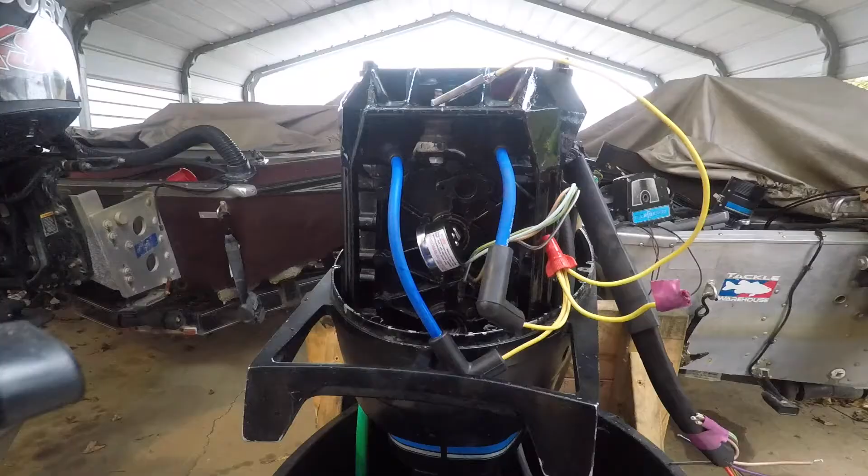This is a no spark situation, sort of like the last one I did. Do a compression test. I'm gonna get my timing light, pick it up. Well, we don't have any fire. See what we got for compression.

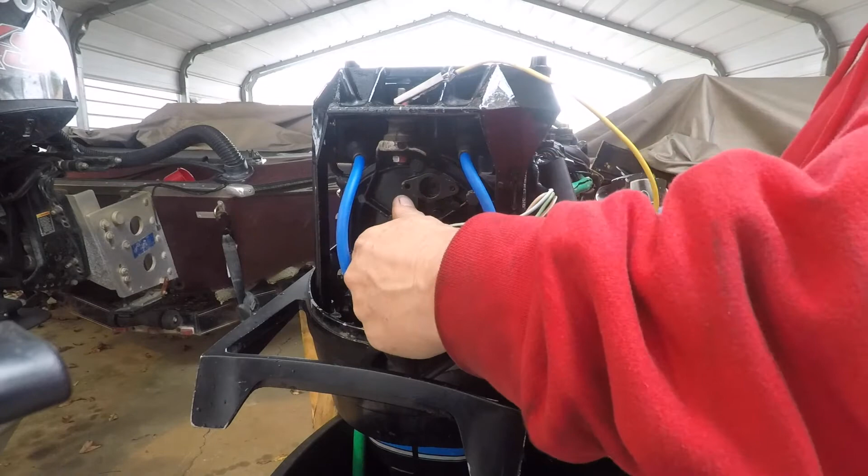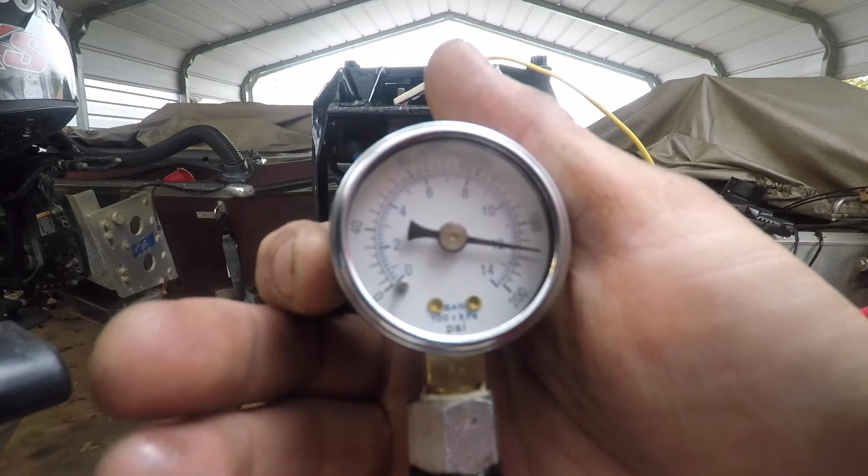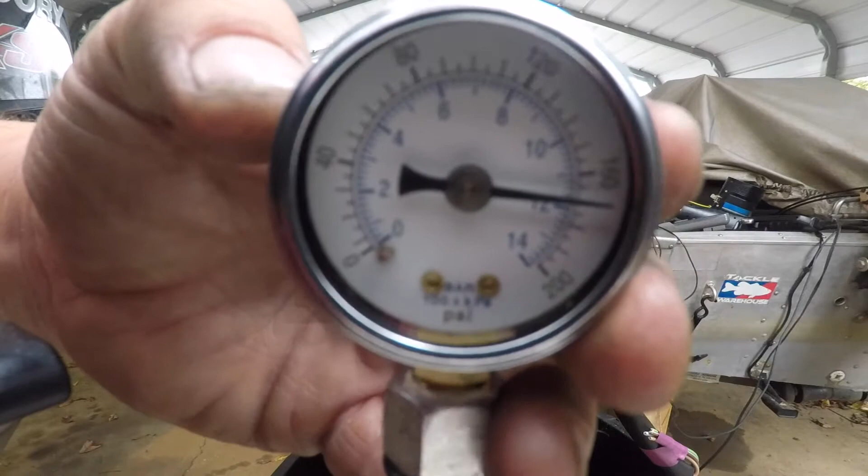I think that one's, you know, over 170 pounds pressure. Alright, no fire. Alright. That one is 170 as well. So yeah, real good compression. Yeah, so this is a no fire. So we just have to figure out why we don't have fire.

I'm gonna have to take this off to get to the coil to see if I'm getting voltage to the coil. We have a bad trigger or switch box or... Okay, we got under the flywheel, you got the coils. I got my setup where I'm grounding out the coils. I got my timing light here. Of course, I have no light, so I have no spark.

Working backwards. We do have the right wires connected to the coils. Number one green, green and white is going to number two. The customer already replaced the coils, so I haven't checked them, but working backwards, obviously this is your ground. We need to make sure this ground and that ground are the same. Okay, so let's start with our grounds.

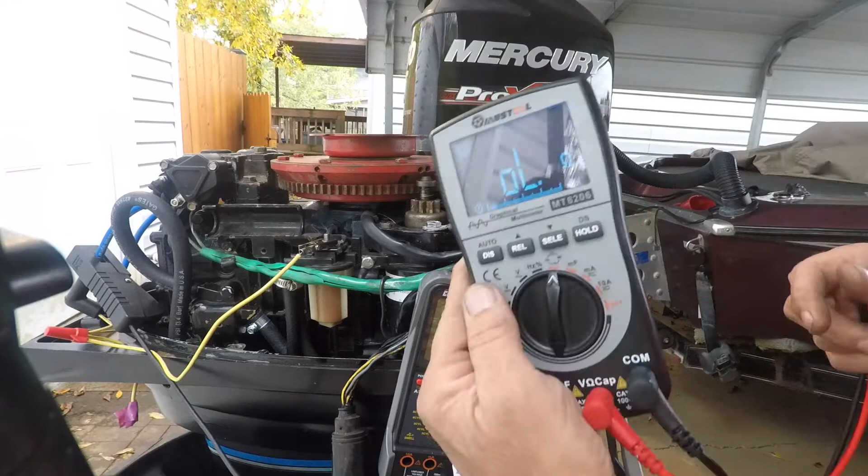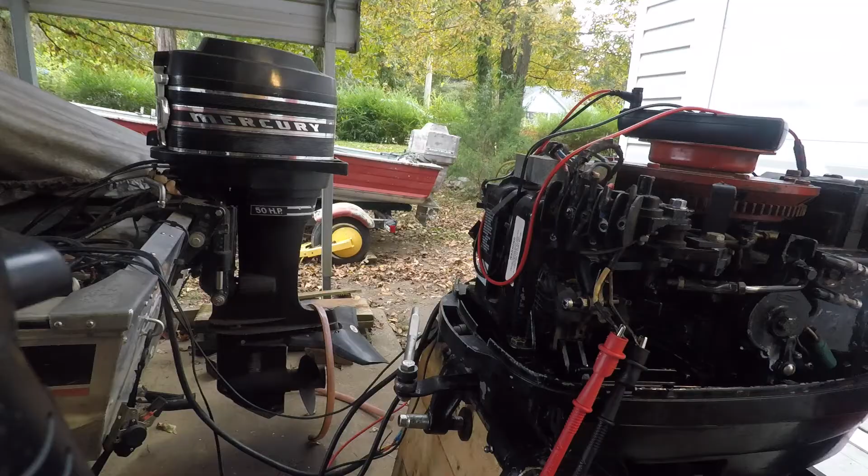Alright, we got the Mustool. It's a cool little meter. So, continuity check. It's going to go to the ground of the box. We got ground on that one. We got ground on the second coil, so we know we got ground there. I got my two leads on the trigger. Okay, and so for this trigger, there's only two wires, two cylinder.

If it was another cylinder, you'd have another wire. If you have four, you'd have four wires. See what kind of voltage we have there, because it's going to be AC. We're on AC. Okay, about 5 volts.

Take the plugs out. I didn't realize the plugs went out. You take your plugs out, it'll help turning it over, so we need to take those out. On our Mustool, we want to go ground. I know this is ground. I check my grounds. Check from here to here, that's a ground. There's no fuel going in it, by the way. So next, I'm going to take those spark plugs out. I'm going to put some WD-40 in there.

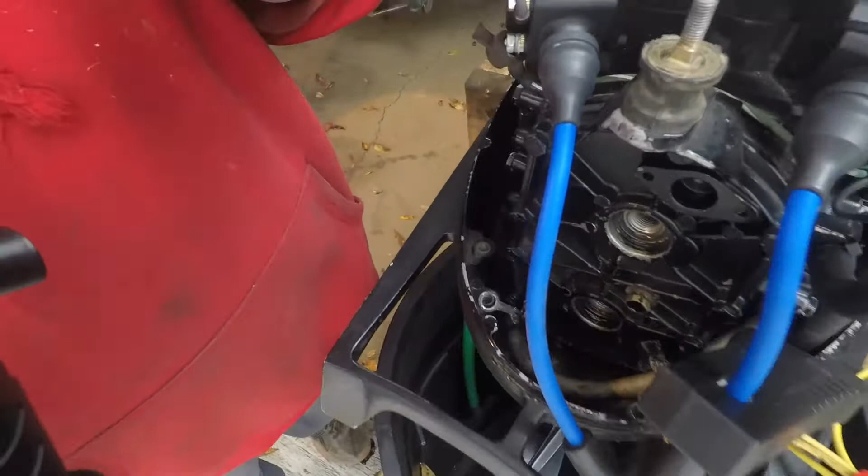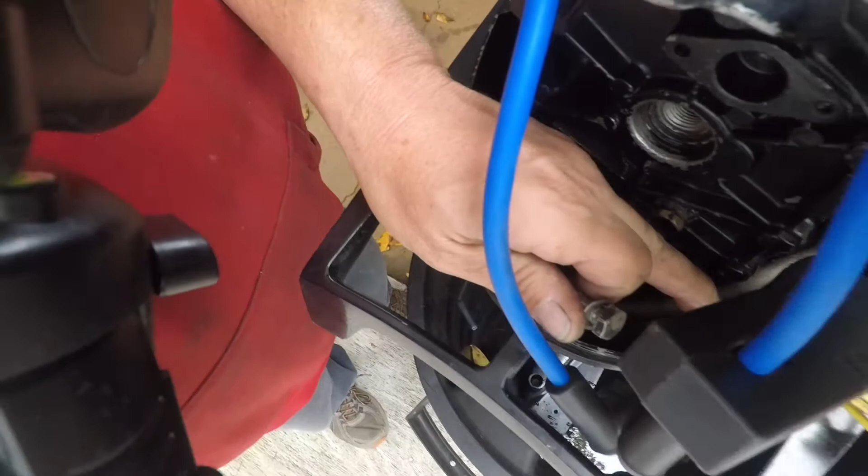One thing to remember: when you take that back shroud off, you got two ground wires. One's here, the other one's over there. You need to put the screw back in it just so it gets a ground. Otherwise, you'll have no spark.

So now this is going to be AC voltage. I got it on 750. I'm just checking the one side of the trigger, the hot side of the trigger. Showing me about 5 volts. The DC voltage, so we're a little low on that battery, but I have been cranking it. So probably need to put a charger on the battery.

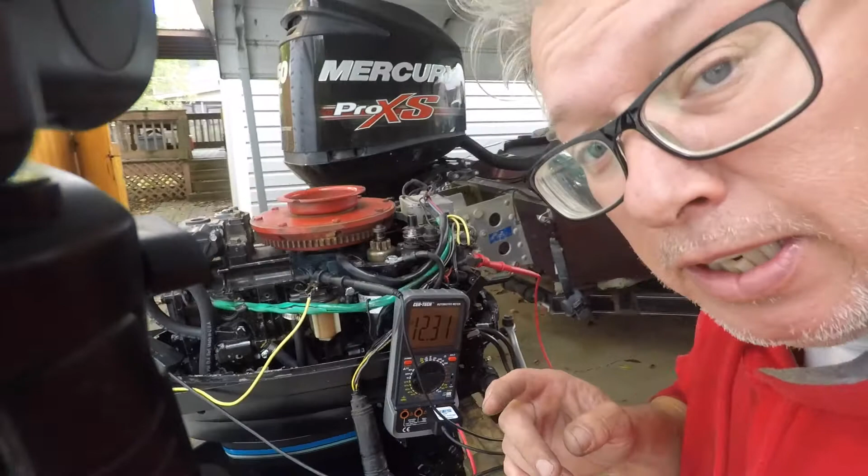One thing about this is you want your battery to stay up, because a weak battery will cause your starter to go out. It's pretty robust, but you send that weak voltage over there and then all of a sudden you got a starter problem. So good tip. See, now I'm at 12.45 volts.

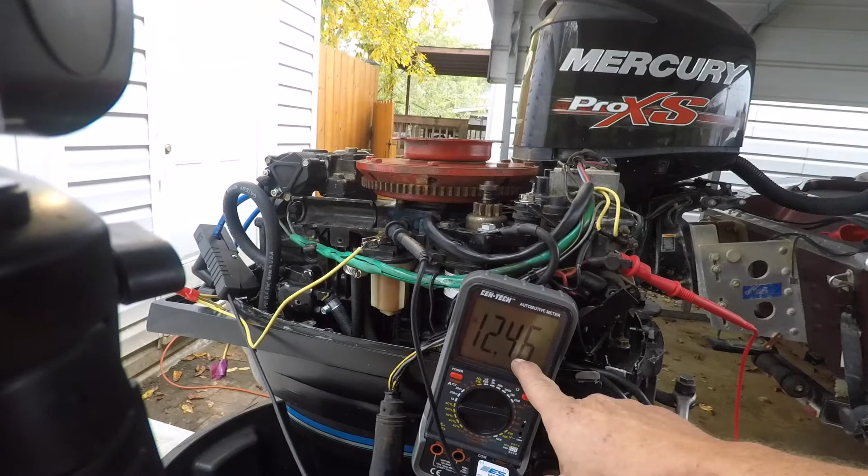But whenever I crank it, I just want to know if I see that voltage go up. Then I know that rectifier's working. You see it go up, so that's for sure knowing that that's working. The way to check that is to go ahead and disconnect these. I could do an ohm test, and I could also do a continuity test.

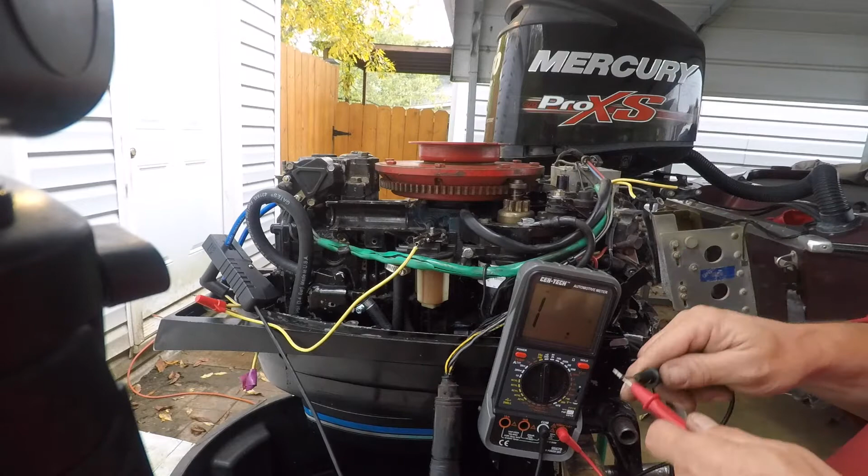We're going to go back to our regular meter leads, not the DVA meter. I got my two yellows that are disconnected from my stator, and we got continuity selected, so there's no resistance and continuity, so that's good. So I've tested the stator now, so these can just go back on. And this gray wire is just a tach. That's where your tach would come from.

Alright, so now we go look up and see what voltages and resistance we should get from the trigger. Okay, so to back up a little bit, if we've got an ignition problem, no spark, you really have to test everything in the ignition system.

So under the flywheel, you've got the stator, and you think of it as providing power for everything. Okay, so you've got two yellow wires that go over to our rectifier. We've got those two yellow wires that go into our rectifier, and then if you look at this cable, there's two more wires, a red and blue. Okay, and what that's doing is powering up through this bus bar. I've got red disconnected right now.

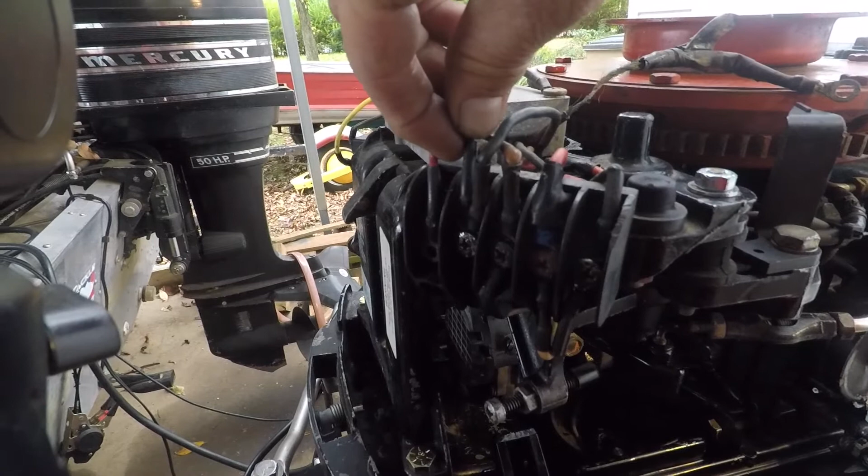Okay, and it was, yeah, they're building another subdivision. That's cool. I got that on camera. That's pretty funny.

We've got our blue wire. Okay, and that's coming from our stator, and that's powering up this box, our switch box. And then there's a brown wire, and that, if it goes to ground, turns the switch box off. Okay, then we have our trigger, which is telling the switch box when to fire.

Okay, and it's coming this way, so we only have two wires on this motor. Some of them you'll have 3 or 4, depending on how many cylinders you've got. And so test your trigger, make sure you're getting the right voltages. Like on a trigger, I had almost a 1K resistance. Alright, and then across the leads, we're getting 5 volts.

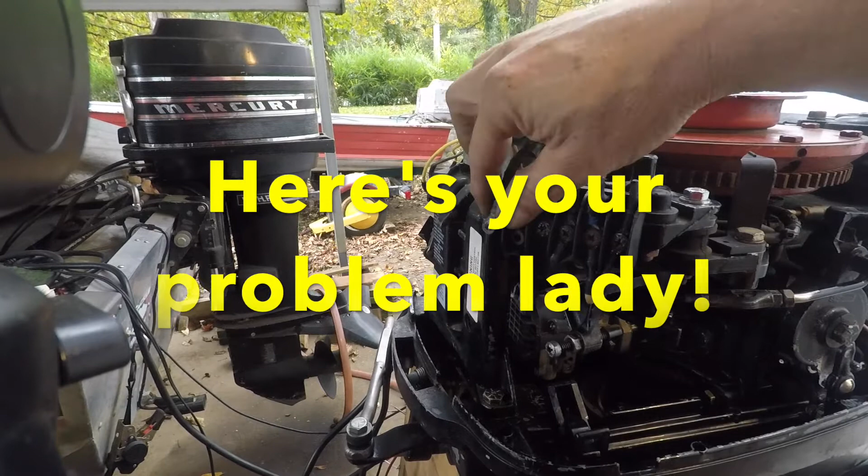I did find this wire, which would be our hot wire, to power up the switch box. It's completely frayed, so it probably needs a new switch box. I'm going to see if I can make a repair and get it to fire, but I would recommend a new switch box, because I know that's probably not good.

Looks like they also made a repair from the trigger side on this hot line. It's right here. Okay, and so we don't know if that repair is good. I take a screwdriver, just pop these off, and then take my switch box off. I'm gonna put it on the bench, see what it looks like.

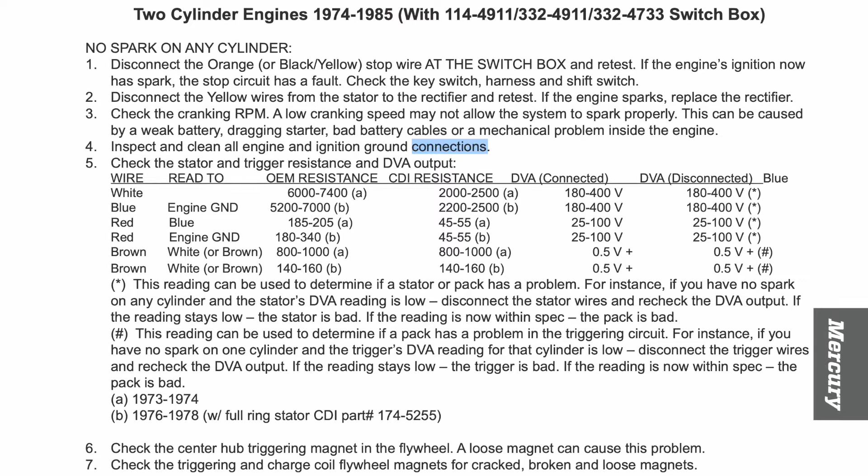Okay, this is from the CDI. This is a company that makes switch boxes and stuff. Anyway, this is our troubleshooting guide, and it gives you some ideas on voltages and resistance. So if you look, it gives you some indication for no spark on any cylinder. So if we look down here, check the stator, trigger, and DVA output. Okay, and so white wire, if we look, it says wire read to.

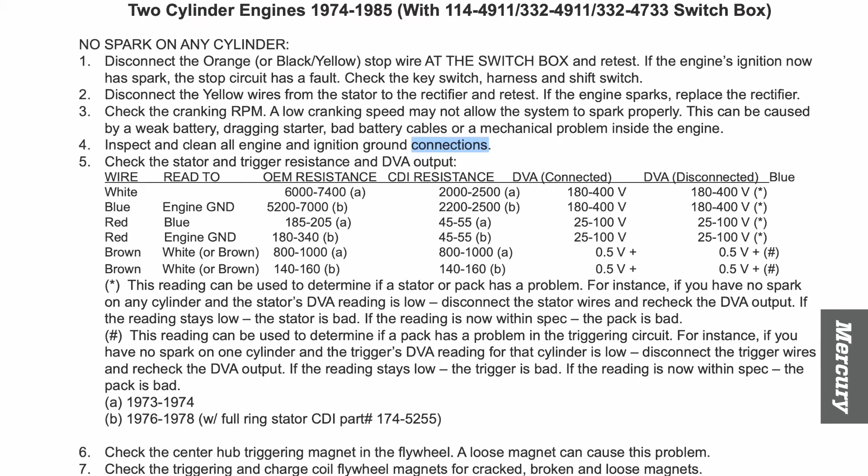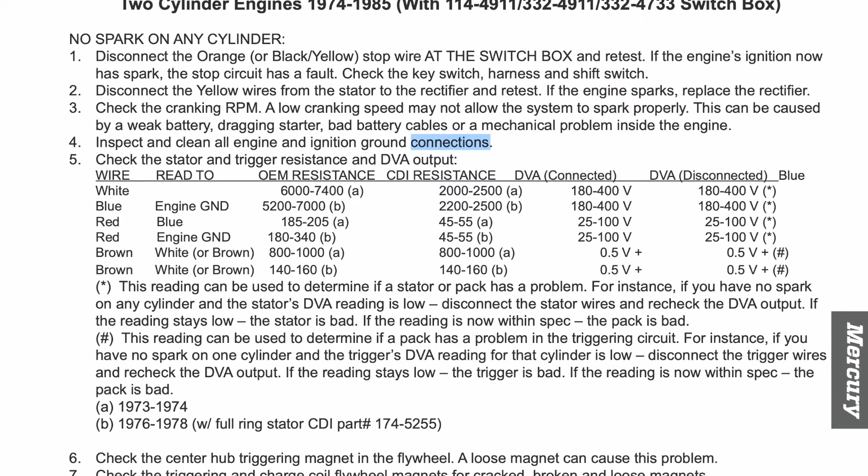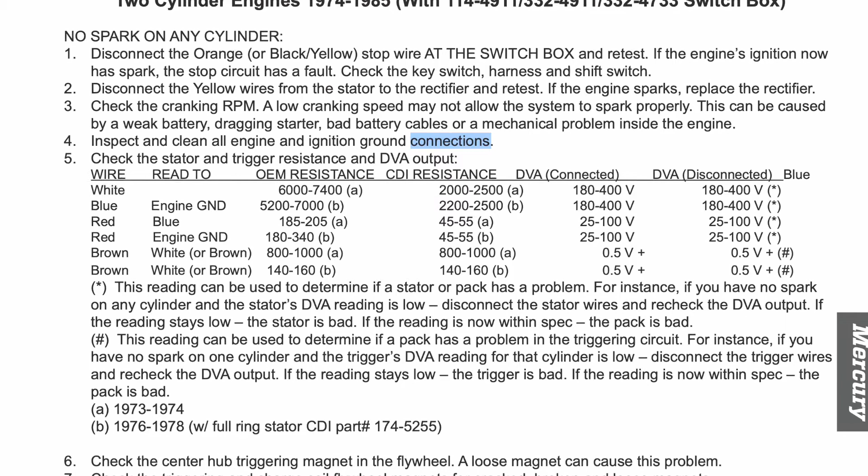So if you see blue and red, it's coming from the trigger. And so we should have around 5,200 ohms. So we got around 7K, and that's pretty good for us. We've got, looks like, from red to blue around 185 to 205 ohms. Then we've got red to engine ground, 180 to 340 ohms.

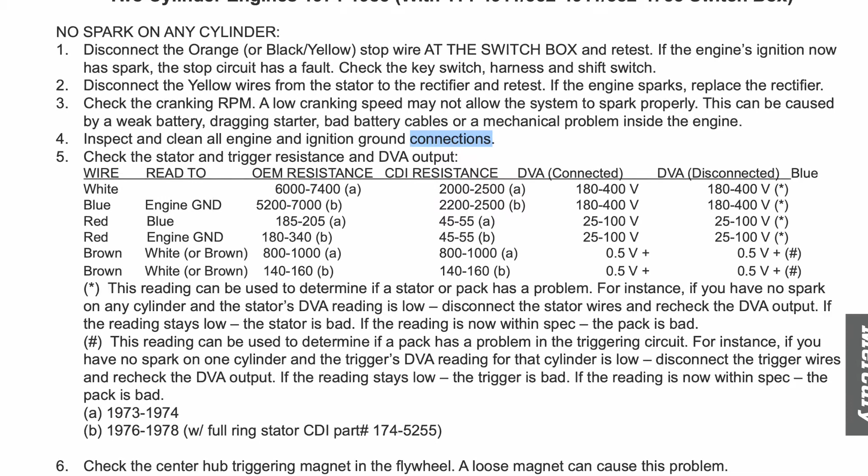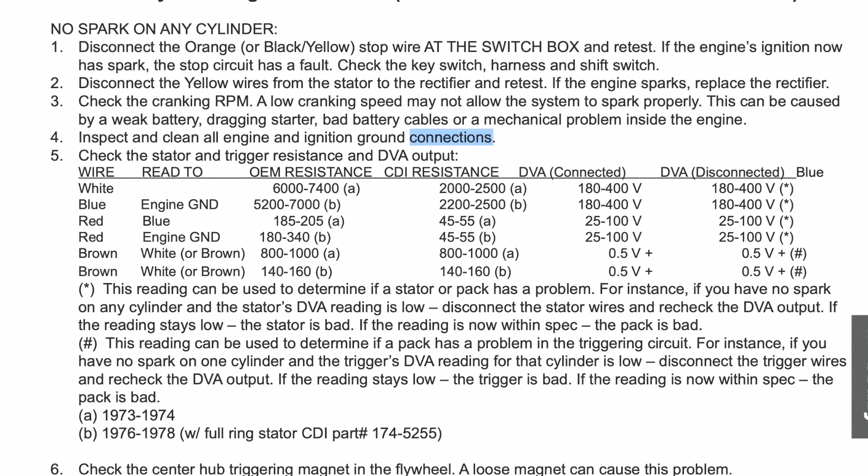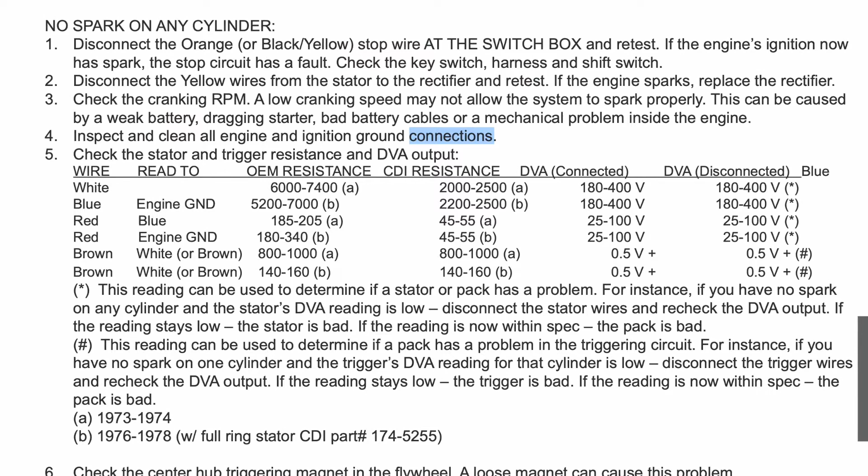Brown to white/brown, which is ground to the 2 wires that come out of the trigger, and it should be around 1K. And then brown or white/brown, the other side of it should be around 140 ohms, and it's showing us like 0.5 voltage. So it gives you a good idea where to start and look and make sure that your trigger and your stator are in spec, and you should be able to find that online.

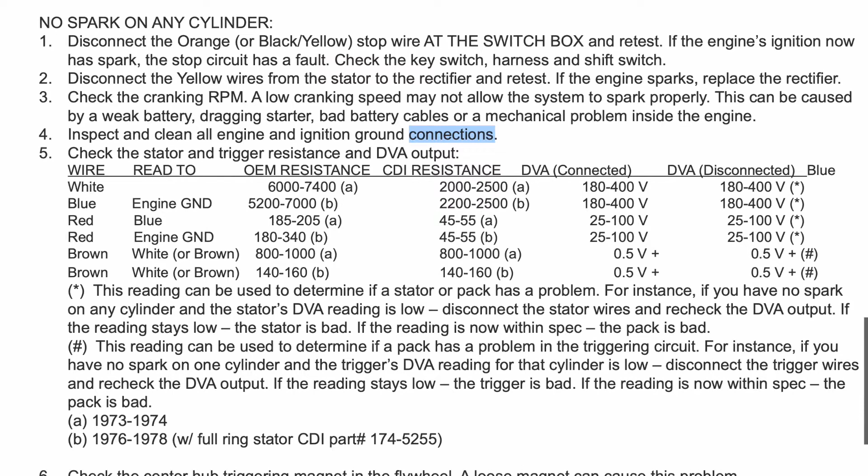So in this case, we ended up purchasing another switch box. We're going to put that in and see if we get fire from here. So the book shows some different numbers. I don't have a book for this Mercury engine in particular. I have one for just about every other one, but not this one. So those are the best, closest numbers that I could get.

But generally, they are pretty close to the same numbers. There's some numbers that are a little different on some of the other motors, but this is about what it should be. So, we can go from there.